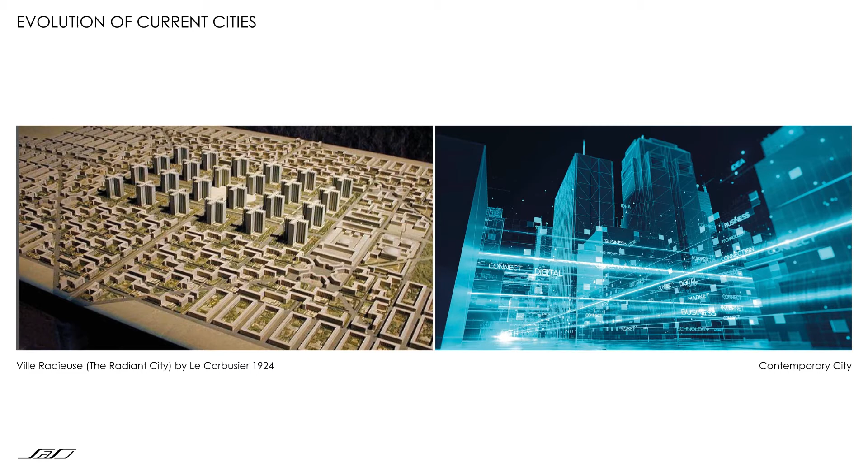We passed from cities organized around a linear concept of time with a rational distribution of functions to our contemporary cities in which multiple layers of interaction happen at the same time across the globe. If we consider, for example, the functional city proposed by Le Corbusier in La Charte d'Athènes, there was a clear distinction of functions in different urban areas. But if we consider the model proposed by Jane Jacobs later on, she reverted this idea of urban model, supporting dense mixed-use developments that could also contribute to improve the safety of the cities.

In the contemporary cities, functions overlap in time. Activities happen simultaneously across the world. The boundaries between public and private space are blurred. Architecture should respond with new dynamic models capable to adapt to the social behaviors that are constantly changing. We believe that architecture should become more resilient to changes in our society, taking account of changes and innovation in social behaviors, many times, for example, driven by innovation in technology. This can happen in several ways. One possibility is to update our business models by introducing more technology in the construction processes.

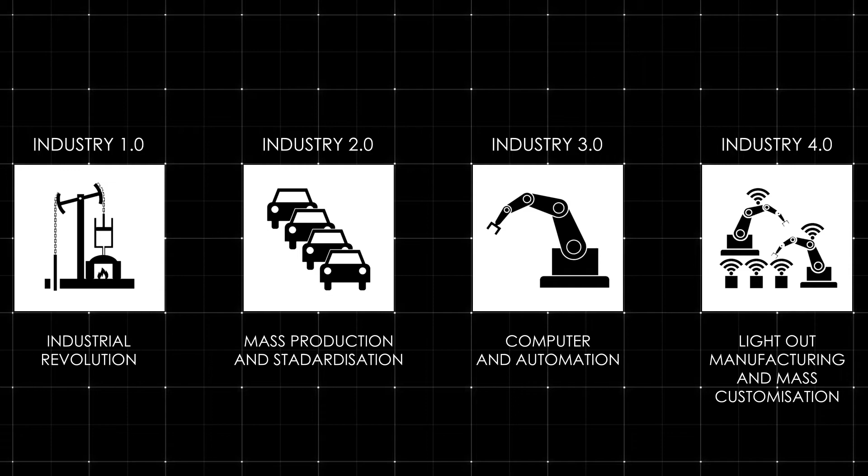In fact, we are living in a new industrial revolution, commonly identified as Industry 4.0, that is characterized by the use of automation and data exchange in manufacturing technologies and processes. For example, the automotive industry is one of the industries where advanced manufacturing technologies have been fully implemented in the production processes. The first assembly line was introduced by Henry Ford in 1913, making, for the first time in history, quality vehicles affordable to the masses. Since then, in less than 100 years, this industry deeply evolved, reaching a high level of automation in the fabrication process, achieving in certain cases what is commonly defined as dark factory or lights-out manufacturing.

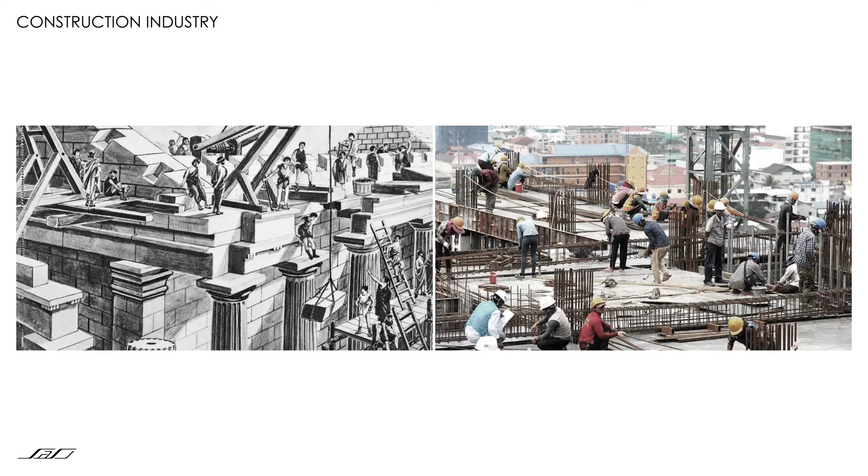If we compare this with the construction industry, the level of automation in the construction processes is much lower. Industry 4.0 represents an opportunity for the construction industry that, in our opinion, can be taken by reorganizing the construction process. One strategy to materialize this opportunity may be adopting off-site manufacturing, in combination with digital fabrication technologies, taking advantage of digital design technologies already widely applied in aerospace and automotive industry, able to generate data that can be used to drive the construction phase.

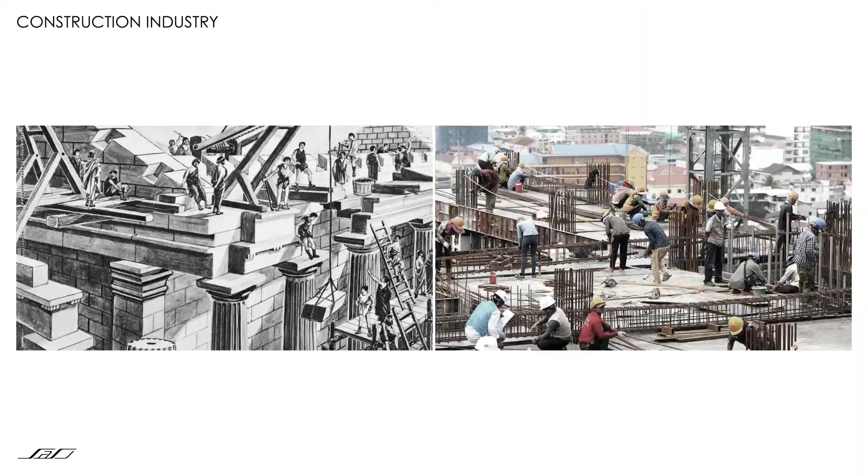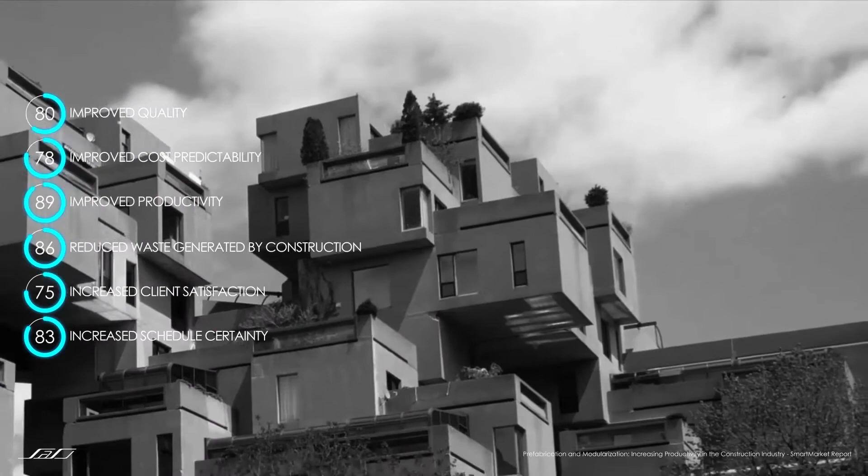In the last years, off-site manufacturing demonstrated to be an interesting field for the construction industry, in which there is room for innovation in several directions. This approach to construction, in fact, allows to achieve higher construction quality, cost effectiveness, and schedule predictability, increasing safety performance and reducing waste and pollution. Off-site manufactured buildings can offer high quality and precision engineering processes and represent an opportunity for ambitious job creation, helping to diversify the workforce, making full use of the high-tech skills of young talents, and training current workmanship with higher level of skills and specialization.

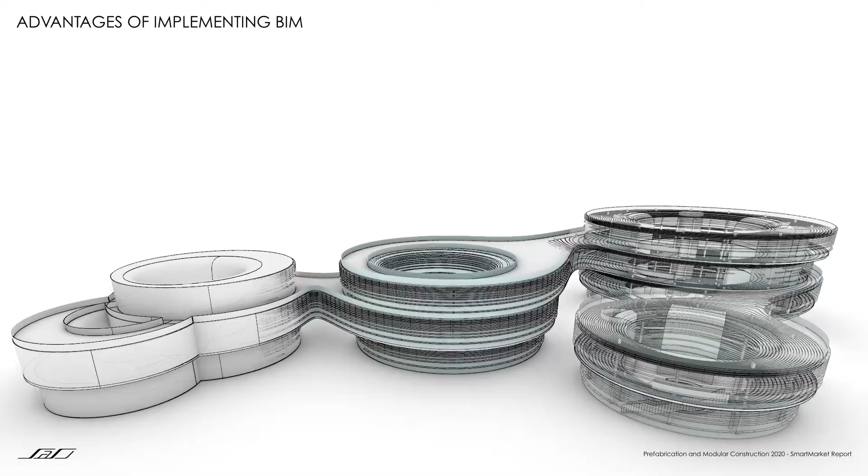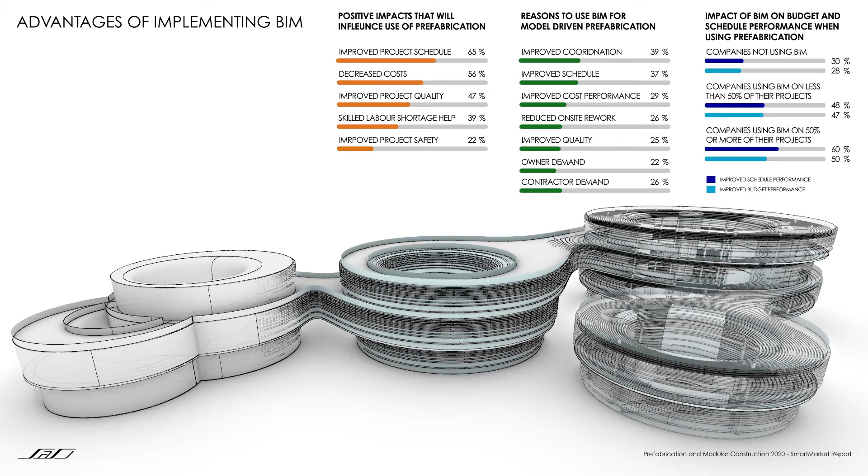In this context, BIM and 3D model-driven fabrication play an essential role to be able to fully deploy the advantages of off-site manufacturing, allowing for high-precision design, high level of coordination, and reduction of clashes, providing all data available for fabrication. As has been highlighted by the Smart Market Report 2020 from Dodge Data and Analytics, the use of BIM and off-site manufacturing helps to reduce costs, increase precision, improving quality and project coordination.

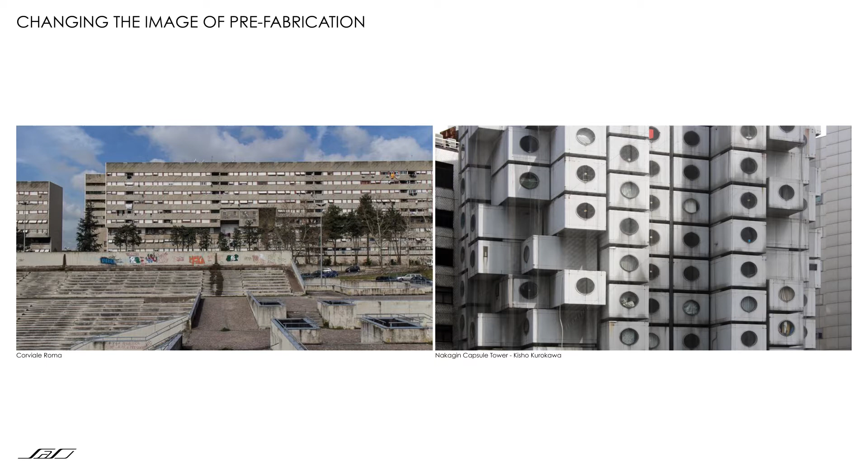On the other side, we have to consider that when we talk about prefabrication, there is a collective image of this construction technology that is commonly associated with rundown buildings and bad quality of construction. And sometimes this collective image is worsened by inadequate maintenance of certain buildings. But there are also very successful examples of prefabrication that managed to become very important icons for our cities.

So one of the first challenges that we have to face is to propose architecture projects that can highlight the potential of off-site manufacturing, taking advantage of latest technologies, demonstrating the possibility of increasing the quality of the living spaces, opening the possibility to introduce in architecture and real estate business models currently available in other disciplines.

In fact, this is another important aspect we have to consider, because in order to deploy off-site manufacturing, a higher upfront capital investment is required compared to traditional real estate financial models. And currently, the volume of demand for off-site manufacturing doesn't justify the upfront capital investment. In addition, traditional funding and financial models are not geared to the requirements of off-site manufacturing.

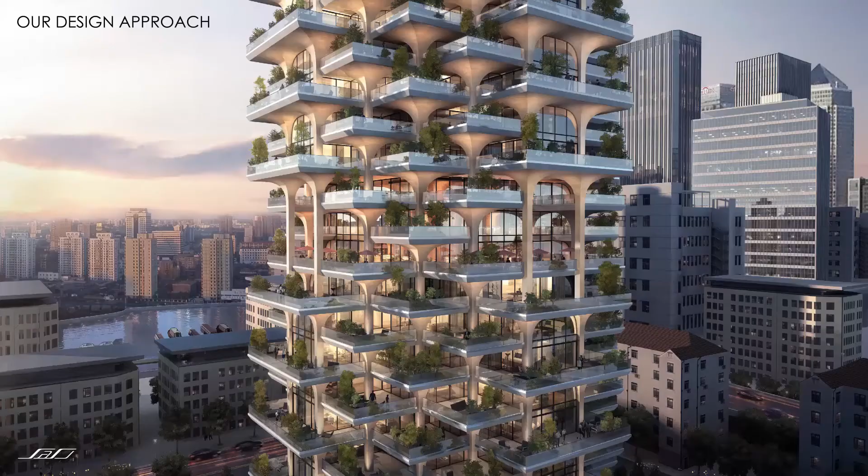This is why at SaSi Studio we are investigating the potential of component-oriented design and digital fabrication to fully deploy the potential of off-site manufacturing. In our design process, we take into account social stakeholders, fabrication constraints, and urban data, and we connect all these layers of information to drive our design decisions. This allows us to create complex layers of information that we can coordinate with the information we receive from other consultants and suppliers and help us in the coordination of the project.

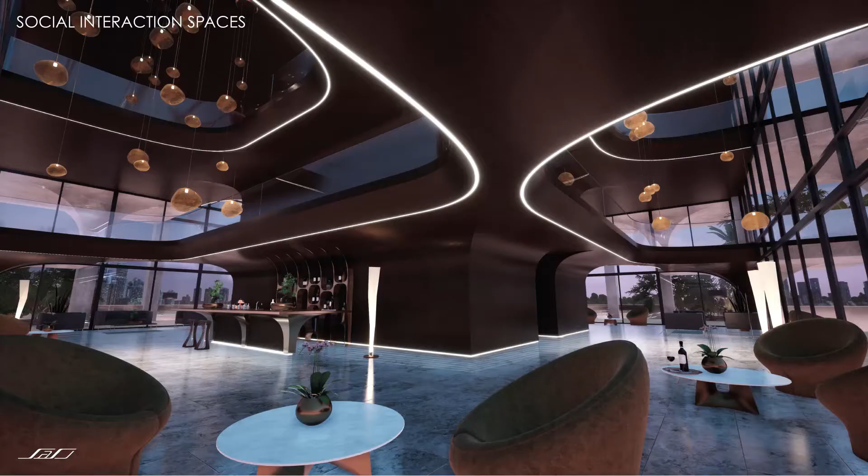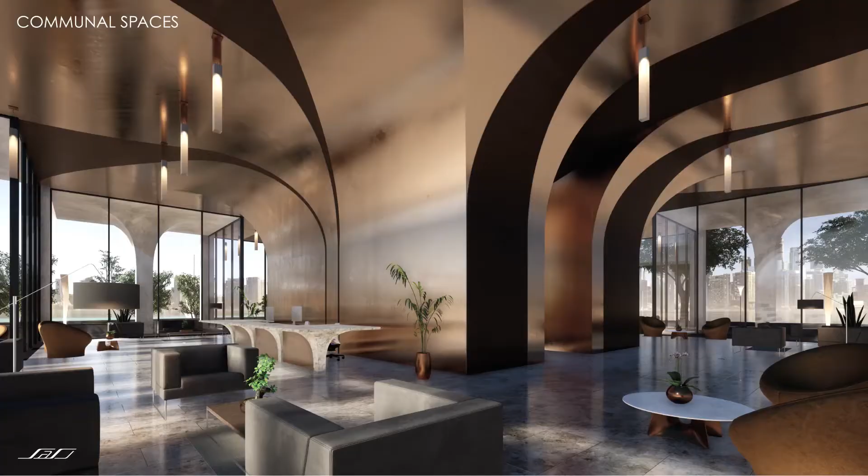In our projects, we aim to offer new living experiences, creating hybrid spaces that take into account new habits in social interaction. These typologies are flexible and can host different functions. For example, they can be spaces for social interaction, but at the same time, they can be spaces to work from home. These become spaces in which the distinction between public and private is blurred. We are willing to create resilient spaces capable of adapting to different user requirements.

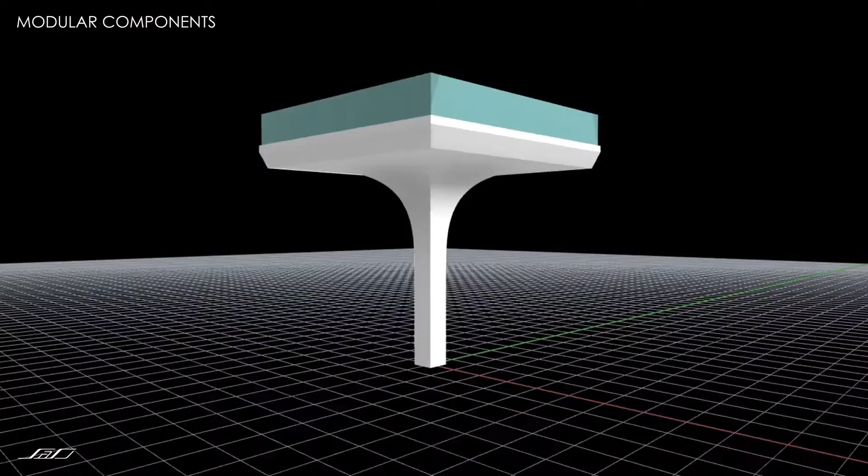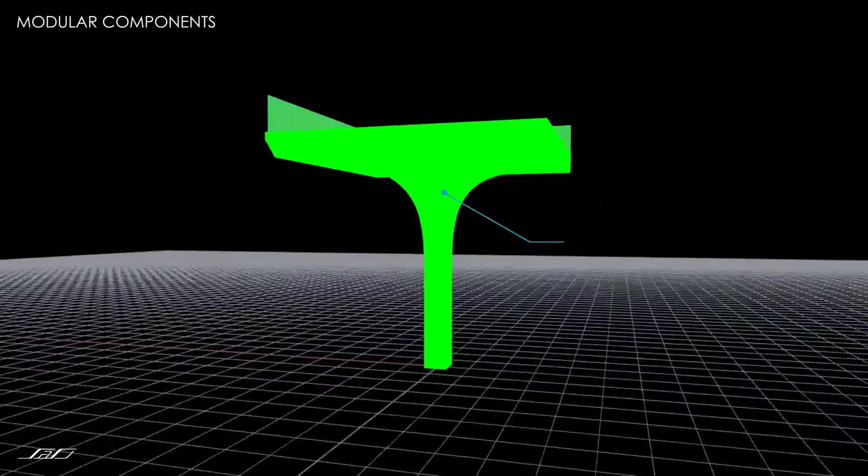In some of our projects, these spaces are created by the combination of modular components, like in this case study in which the facade has been designed using one module that has been rotated and shifted to define the overall massing of the tower. The geometry of the modular component takes into account fabrication constraints using single curvature surfaces and making it possible to build all the modules through the use of reusable formworks, reducing wasted material and pollution.

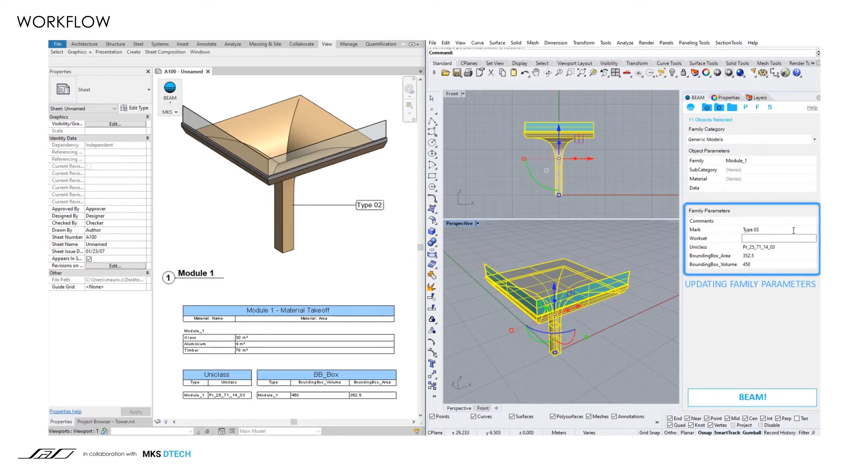Our company has an experimental approach that reflects on the design but also on the workflows that we use in our projects. In fact, we adopt the latest BIM technologies using cutting-edge tools to optimize our workflow. For example, we do this cooperating with other startups like MKS to introduce custom tools that improve automation and data exchange across different platforms, like the BEAM plugin that allows us to embed data in the geometry and transfer it across several platforms.

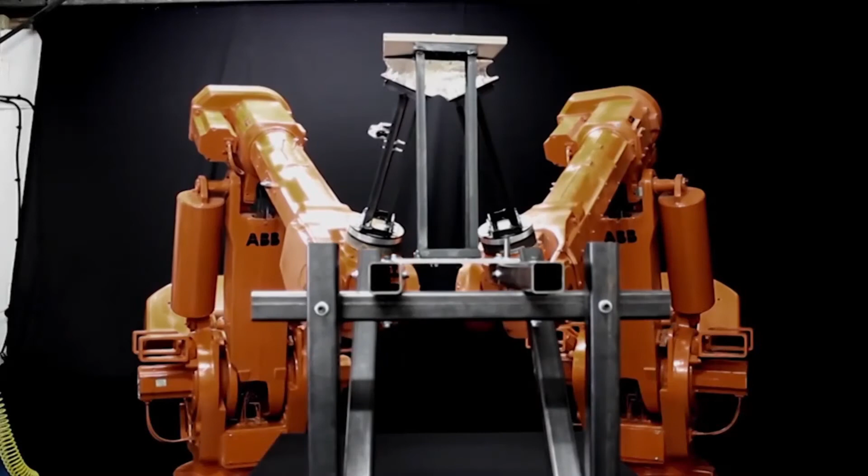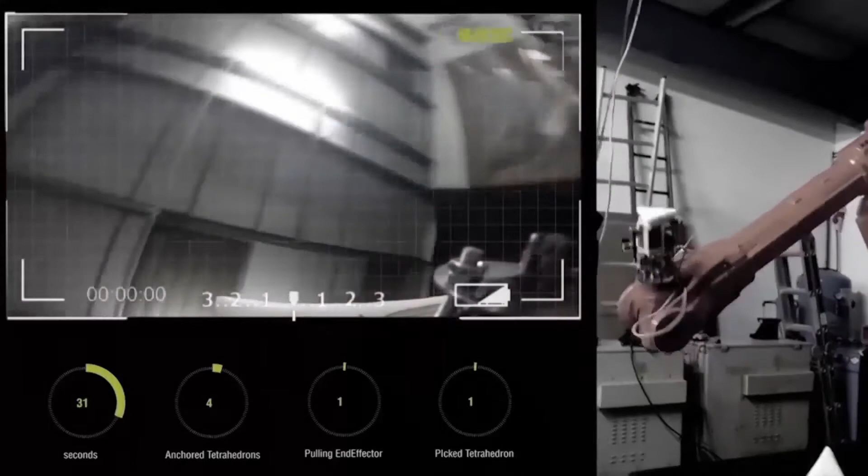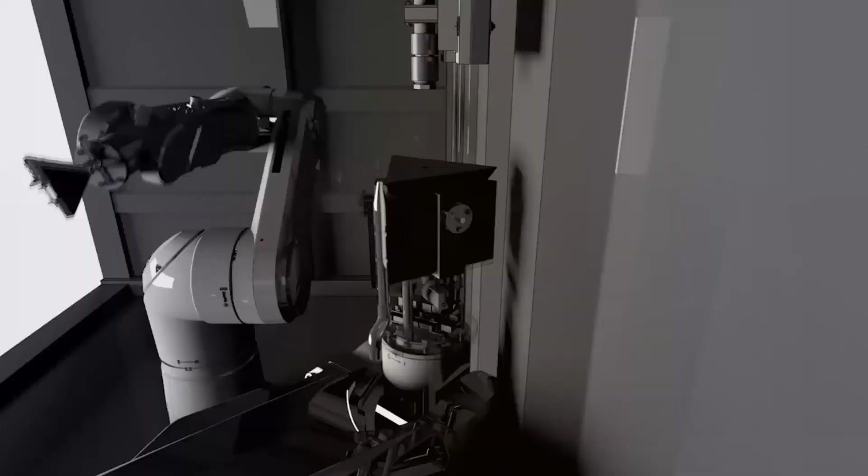In some of our projects, we develop design systems that can be deployed thanks to the use of cutting-edge fabrication technologies based on the use of robotics and artificial intelligence. We work with innovative materials and we test them in experimental projects to explore new possibilities opened by the use of computational design and digital fabrication.

In our projects, we use 3D models to embed several types of data, and we use them to inform our design. We create BIM models in which we layer the information in different datasets, and we make this model an essential tool for the coordination of the project across all the stages.

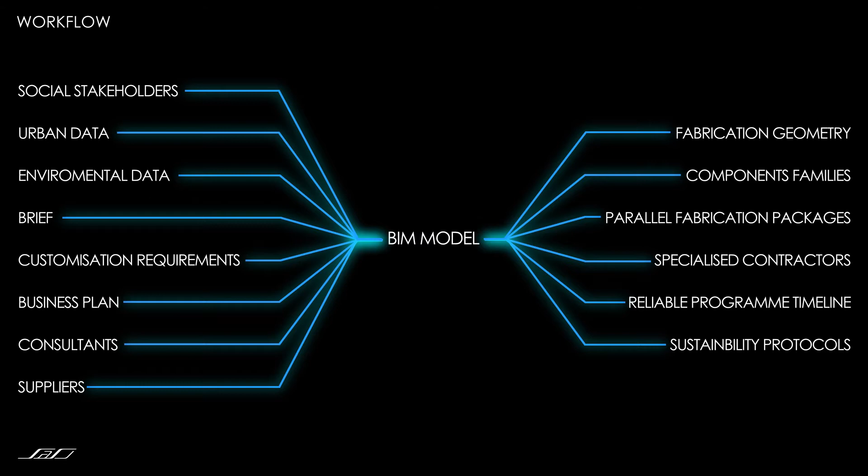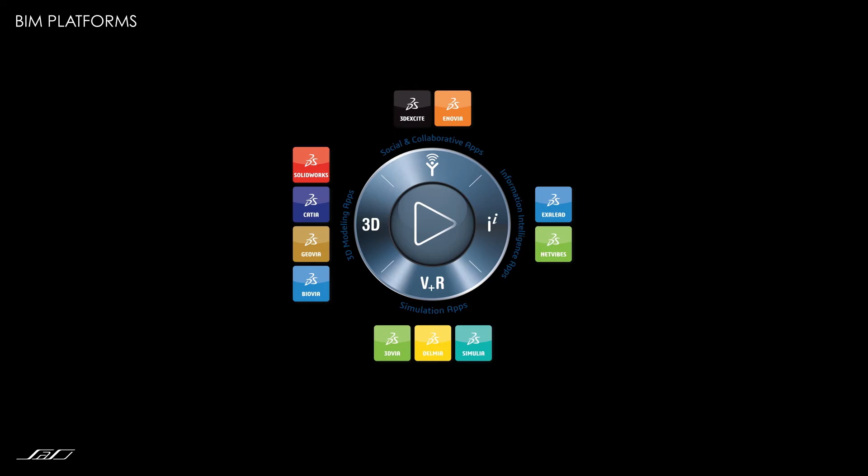This type of workflow becomes even more powerful when it's deployed in environments like 3D Experience, in which you can combine different types of data sources and elaborate them with several advanced tools, all fully integrated, like for example Imagine and Shape and generative design, that allow us to create complex geometries and parametric models, generating data-driven simulation and making this data accessible across the project team, improving the coordination inside the team, and also making this data available straight away for fabrication.

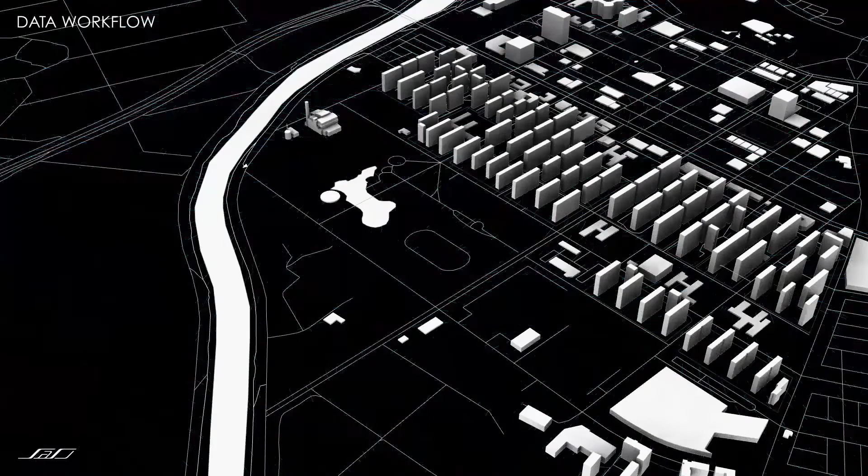From early stages of design, our workflow involves the use of environmental data, site analysis, topographic conditions, urban data, and social stakeholders. We use this information as a driver for the design process. In this way, the massing responds both to program requirements and available data, creating high-performance buildings that are designed taking into account the end-user requirements.

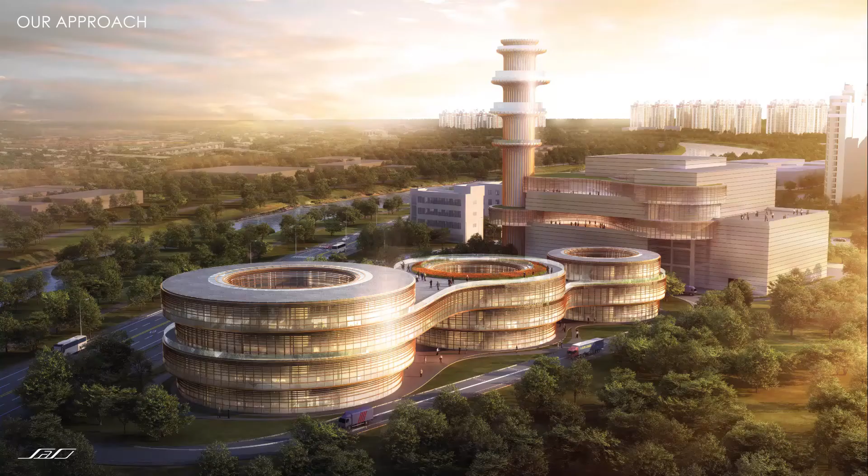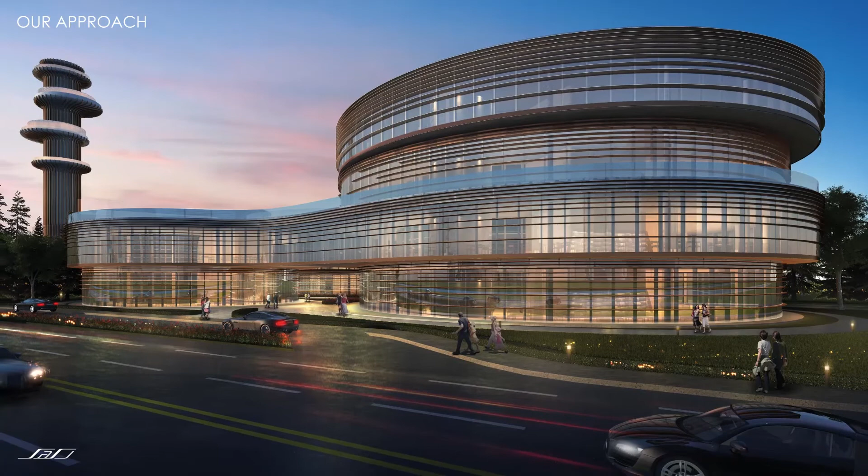An important aspect of our workflow is the capability of creating virtual reality and advanced CGI images that allow us to have the result of this design process available at an early stage of the project. This helps to establish a clear understanding of the project, communicating it with all the stakeholders, and has a positive impact on several aspects such as fundraising, planning approval, etc.

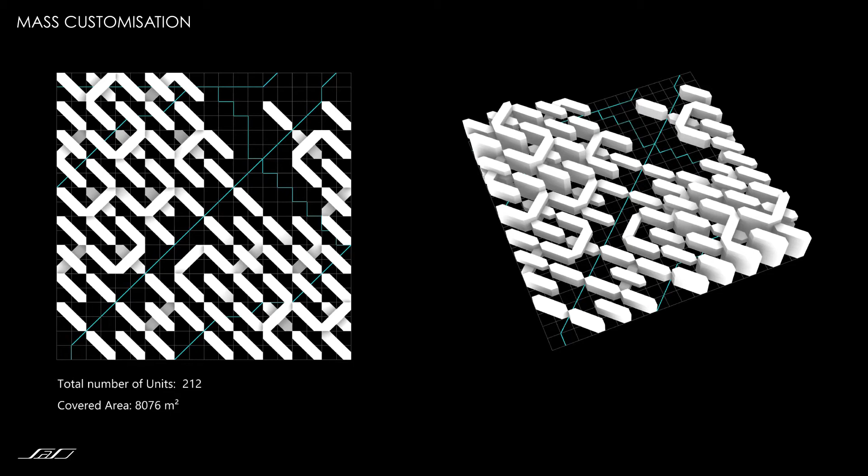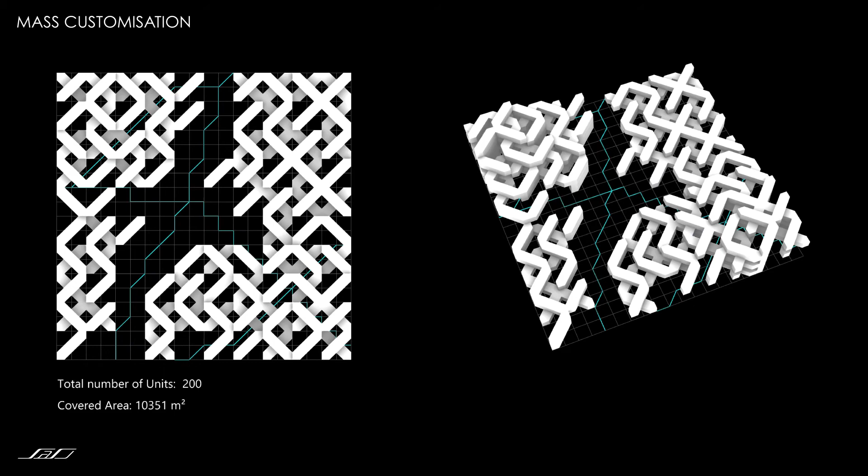Part of our research and development focuses on developing innovative component-based systems that can respond to urban data and constraints, creating spaces that are resilient to multiple functional scenarios and can be adapted over time. Using computational resources based on artificial intelligence and digital fabrication, we can enable mass customization at urban level, offering unique living experiences to the end users.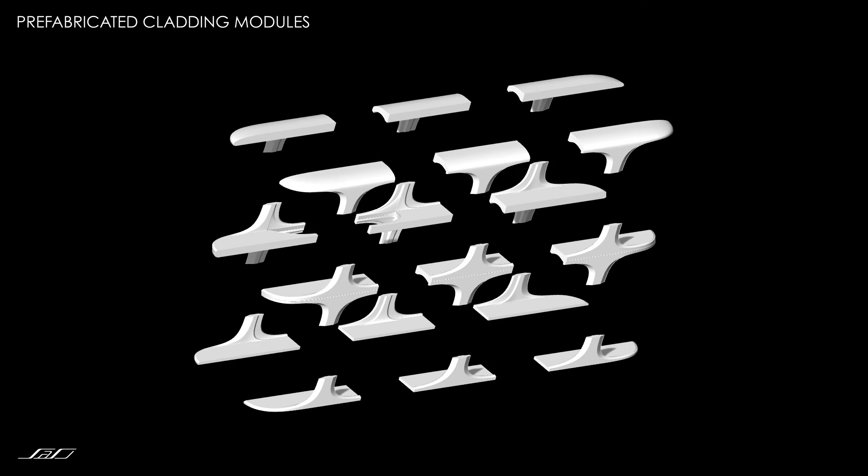The use of big data, together with building information modeling combined with digital fabrication, allows us to create a high level of customization without requiring the use of expensive construction processes, using different families of components that can be highly customized based on the end user requirements.

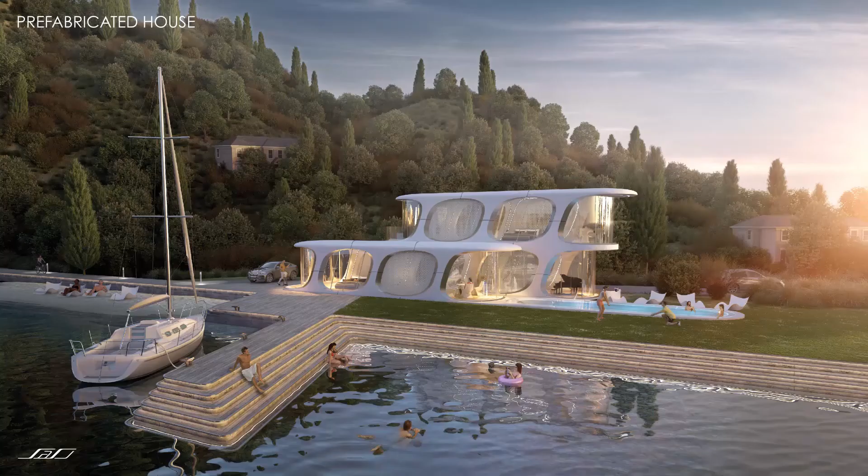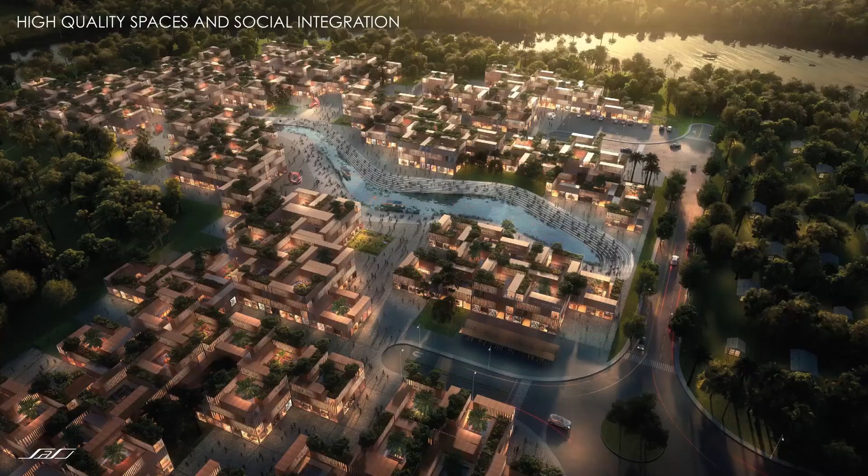The use of prefabricated assemblies allows us to generate highly customizable buildings that can be easily deployed, adapting to local environmental conditions. The goal is to create spaces that establish with the user a sense of belonging, to build integrated communities in which architecture and society evolve together, learning from each other like a natural ecosystem.

We are operating as a studio as part of a wider network of professionals, suppliers, contractors, and we are open to collaboration with other companies, investors, and developers that are willing to invest in new technologies and find together new ways of creating and using the space in which we live every day.